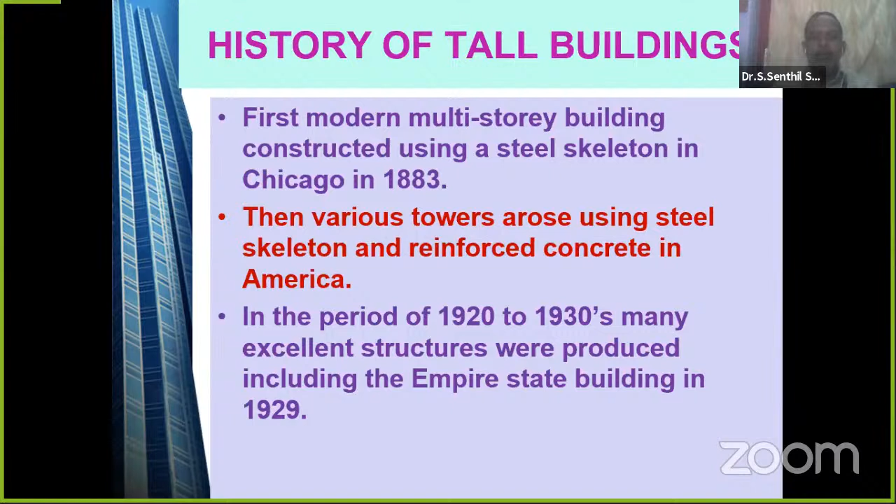The first modern multi-story building was constructed using a steel skeleton in Chicago in 1883. That's the first multi-story building. We can say that the multi-story building concept was started in the year 1883 itself. Then various towers using steel skeleton and reinforced concrete structures came in America, and in the period of 1920 to 1930, many excellent structures came into the world. Particularly, during that period, one of the world wonders, the Empire State Building, came in the US in 1929. That was considered one of the world wonders during that time.

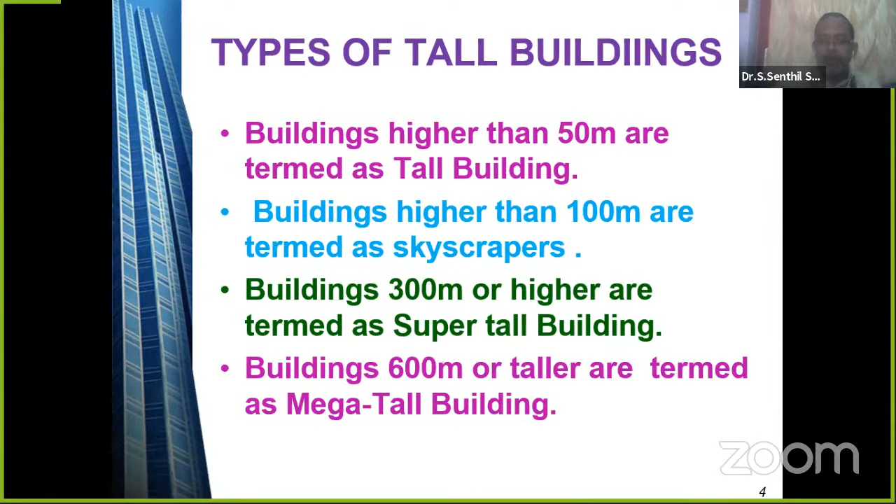We can differentiate the types of tall building according to the height or the number of floors. Buildings higher than 50 meters are termed as tall buildings, and buildings higher than 100 meters are termed as skyscrapers. So between 51 to 99 meters, we can say it's a tall building. When it crosses 99, we can say it's a skyscraper. Buildings 300 meters or higher are termed as super tall buildings. When the height of the building is taller than 600 meters, it is termed as a mega tall building. Therefore, tall buildings are differentiated in 4 ways: tall building, skyscraper, super tall building, and mega tall building.

Why do we have to go for tall buildings? Before going to see the seismic design of tall buildings, we will see what a tall building is, how to construct it, and the points to be remembered while constructing a tall building, taking care of lateral forces like earthquake forces and wind force. The demand for tall buildings comes due to the scarcity of land. Scarcity of land in the sense that when urbanization comes, the population increases, but the area is the same. So to accommodate more population in a smaller area, it is mandatory to go for high-rise buildings. That's the first demand, scarcity of land.

Second one, economic growth. Economic growth is nothing but the growth of the particular place. When you consider Chennai city, the economic growth depends upon the population movement, and more corporate buildings come into the city. So when more buildings are required in a smaller area, ultimately you have to go for tall buildings. That's economic growth. Increasing demand for business and residential space: when it is becoming a metropolitan city, a lot of business should be taken care of in the particular area. The area remains the same, but more corporate people will come and go, and more buildings are required in lesser space. That leads to bringing the tall building concept.

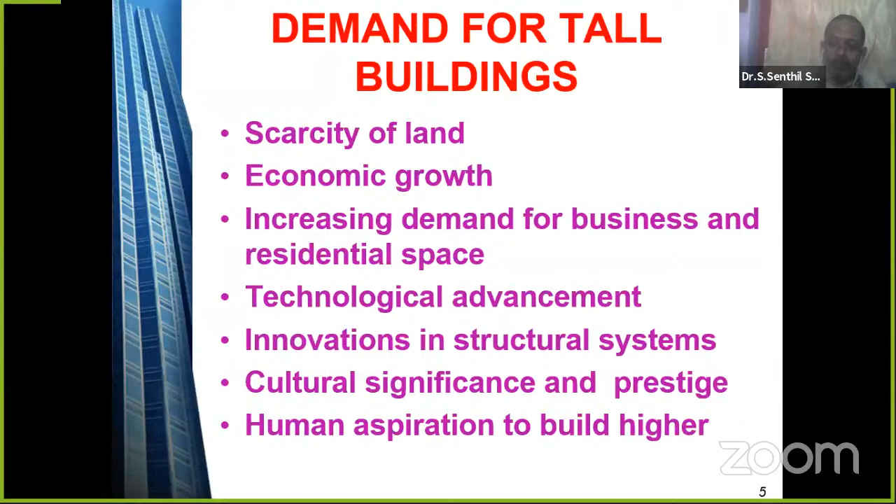Human aspiration to build higher. Actually, the human aspiration is the desire of the people to go for tall buildings. That is the demand for making tall buildings. The need for tall buildings is a mark of prestige, civilization, a landmark in the global picture. Global picture means, if you take Google Earth, the Taj Mahal is a landmark of our India. Similarly, tall buildings are the landmark of a particular country. It is also a symbol of pride.

Okay, increase in demand for shelter is met without encroaching on agricultural land. When we are constructing a multi-story or tall building, we are using only a small area, and we are not encroaching on the area which is already being used for agricultural purposes. That is one of the advantages and needs that leads to tall buildings.

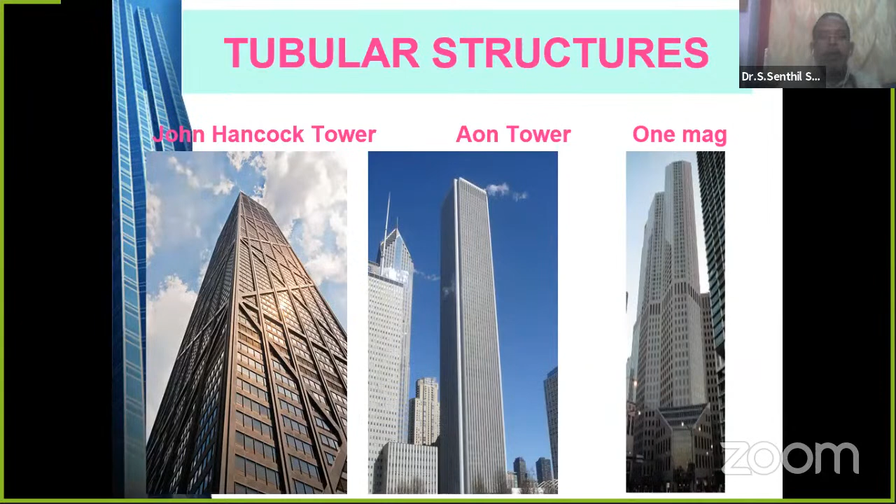Design philosophy: for the design of a tall building, a thorough knowledge of high-rise structural components and their modes of behavior is essential for a lateral load resisting system. If you want to design a tall building, you should know the behavior of the structural components and the modes of failure. All these things are required before designing a tall building. It should be efficient and economic. Whenever you design or construct a tall building, it should be efficient and economic. As civil engineers, we always see these two things, and it should serve the purpose also.

Increase in availability of structural analysis programs needs an understanding of the fundamental knowledge of structural behavior. See, different types of softwares are developed for the analysis and design of tall buildings, and the availability of structural analysis programs leads to the need for fundamental knowledge of the structural behavior of all structural elements in tall buildings.

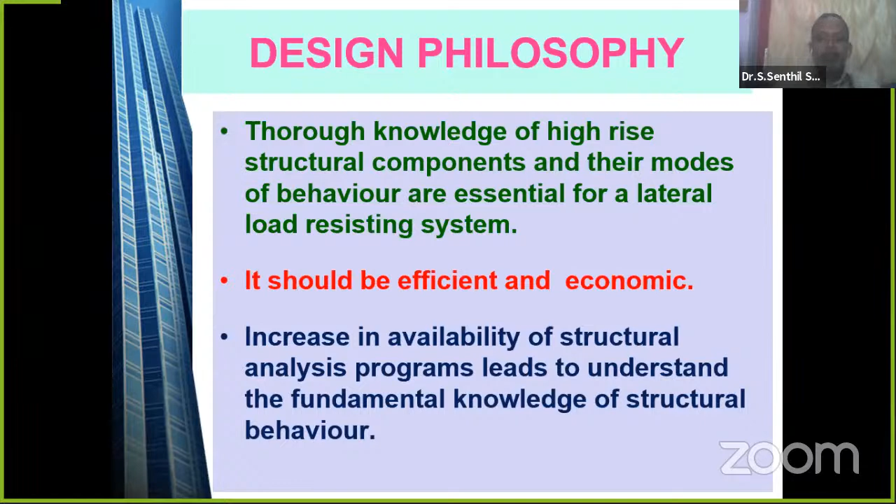These are some of the loads that act on the tall building. Usually we know many loads already - general loads like dead load, live load, snow load. These are some of the general loads.

Beyond which, some loads are very predominant, peculiar, or special for tall buildings. They are impact load, wind load, blast load, and seismic loads - that's earthquake load. These are very important loads to be considered in tall buildings.

Earlier, before the impact of the flight on World Trade Center, the impact load was not considered in the design - not that a huge amount of impact load was not considered, but after the collapse of World Trade Center by the impact of the plane, they considered it while designing tall buildings. They are now considering impact load while analyzing and designing multi-story building structural components.

The wind load always acts laterally, normal to the structure, and then there's blast load. For blast load, we already have code books available - we have to consider it. It is a short duration load that we also consider while designing tall buildings.

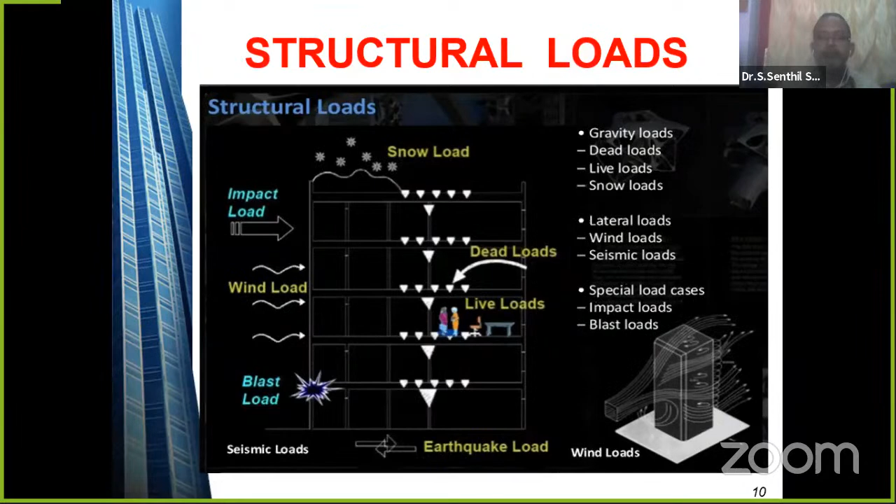Classification of tall buildings: the structural system of a tall building can be divided into interior structure and exterior structure. Actually, the tall building concept is not like a regular building - there are two types: interior structure and exterior structure.

This depends upon the position of the column and the core, and how the columns and beams are provided in the tall building. When taking interior structures, by clustering steel columns and beams in the core, engineers create a steel backbone that resists tremendous wind forces in the inner core. A large amount of columns are provided in the interior, and all the slabs are extended from the interior.

The exterior structure has columns provided at the periphery, the perimeter of the building, creating a hollow, rigid tube as strong as the core design, but weighing much less compared to the interior structures.

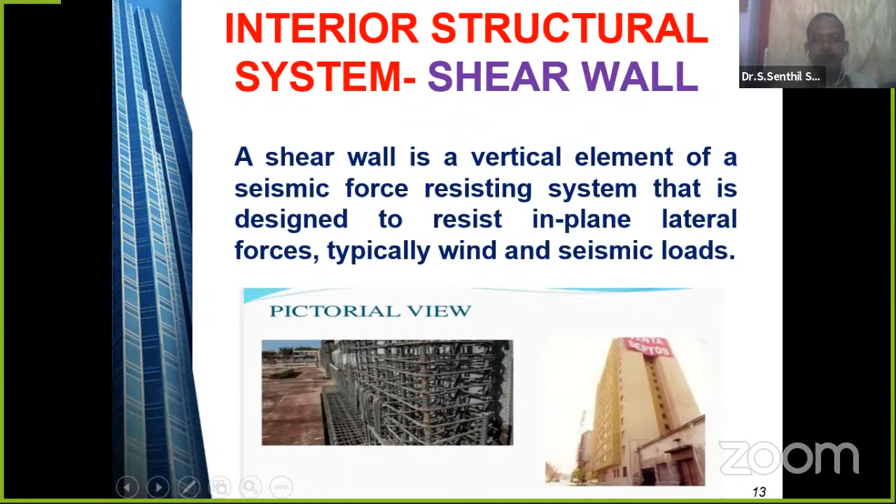Exterior structures include tube and tube systems. I already told you about the tube system, the outer tube. This exterior structure, and many kinds of exterior structures, are available as tube systems. These tube systems are incorporated in buildings in and around the world.

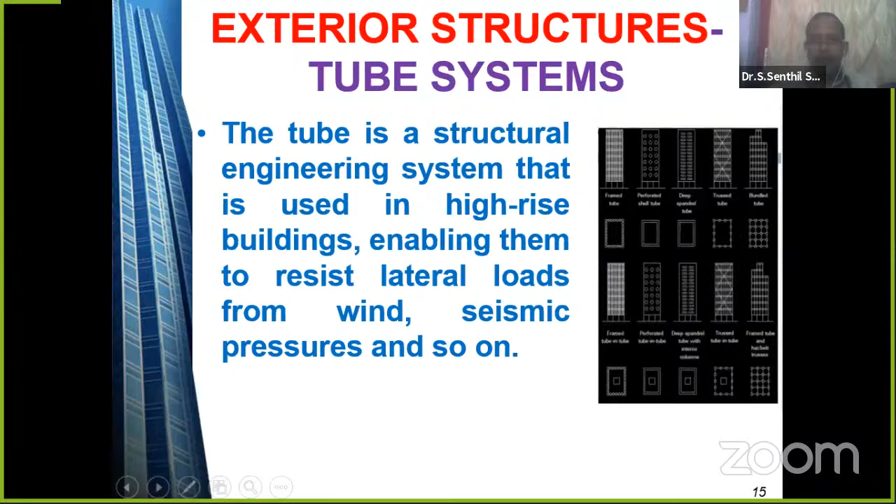Coming to exterior structures, this is a diagrid system, a diagonal grid, made like this. The diagrid system is adopted in tall buildings due to its structural efficiency, flexibility in architectural planning. Compared to closely spaced vertical columns in frame tube systems, diagrid structures consist of inclined columns, as you can see in the photograph.

There is an inclined column, a basic diagonal column, consisting of inclined columns on the exterior surface of the building. These diagonal systems are provided to take care of large amounts of lateral forces. This is a very effective planning from a structural point of view, very effective in handling lateral forces.

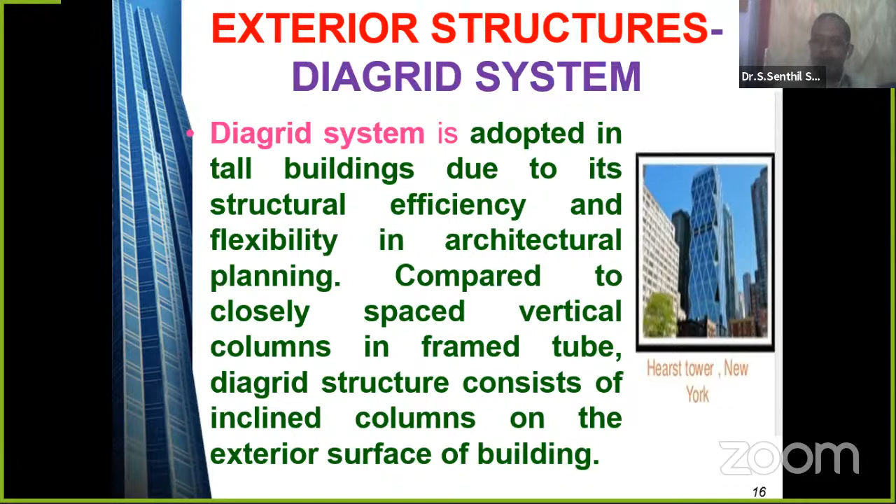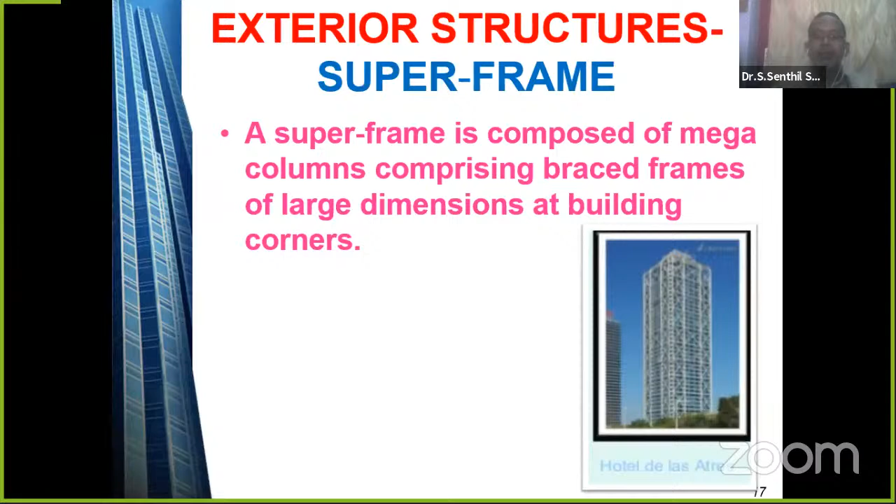Another exterior structure is the super frame, composed of mega columns comprising braced frames, with large dimensions provided at the building corners. In the super frame, the corners are very effectively placed. Mega columns are provided comprising braced frames, where columns are connected with bracings, so that the entire structure becomes a mega strong building. This comes under the tube concept.

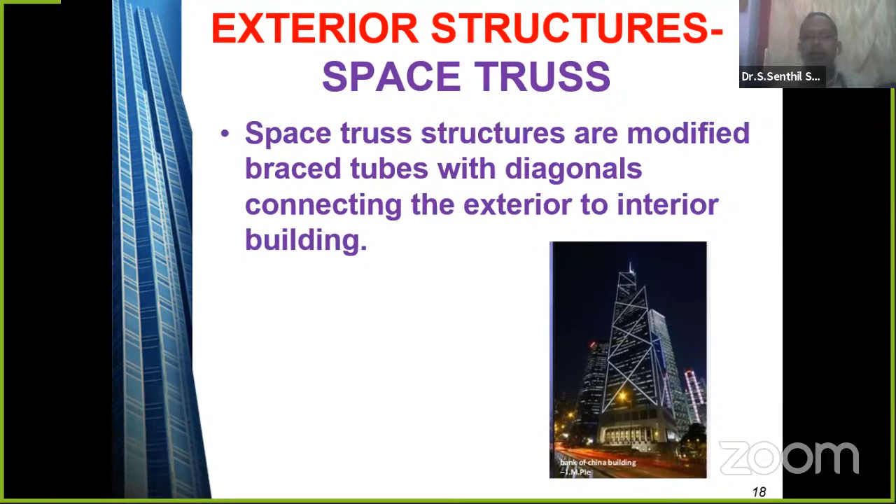Space truss structures are modified braced tubes with diagonals connecting the exterior to the interior of the building. These space trusses are three-dimensional, where the exterior diagonal members are connected to the interior members using horizontal members, which is why it's called a space truss. This makes the structure more strong and reliable, and from an earthquake or lateral load point of view, it will take a large amount of lateral forces without any drift.

The Petronas structural system is a tube in tube system, meaning an outer tube and inner tube will be there. Applying a tube structure for extreme tall buildings is a common phenomenon, as already explained. The exterior surface is made with a large number of columns around the perimeter of the building.

The Petronas Tower has 88 floors, constructed largely of reinforced concrete, and you can see the outer glass facade. This glass facade was designed because Malaysia is a Muslim religious country, and it is designed to resemble motifs found in Islamic art, a reflection of Malaysia's Muslim religion. It was constructed taking their religious aspects into consideration.

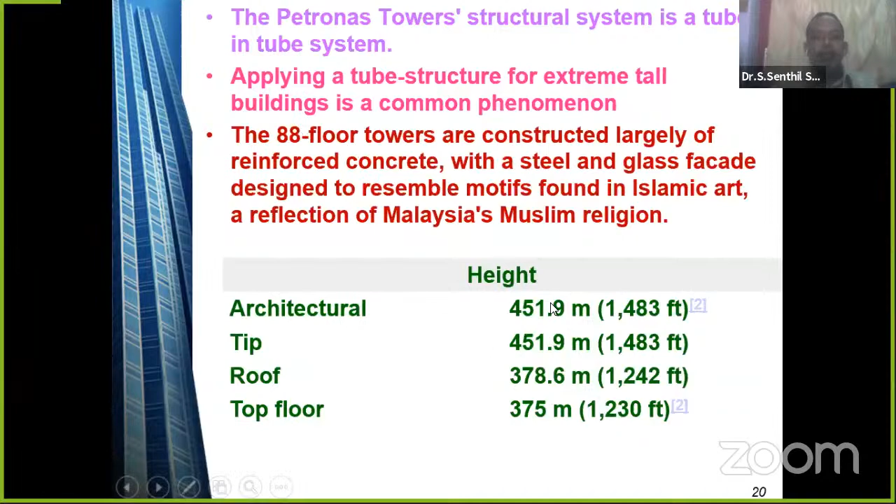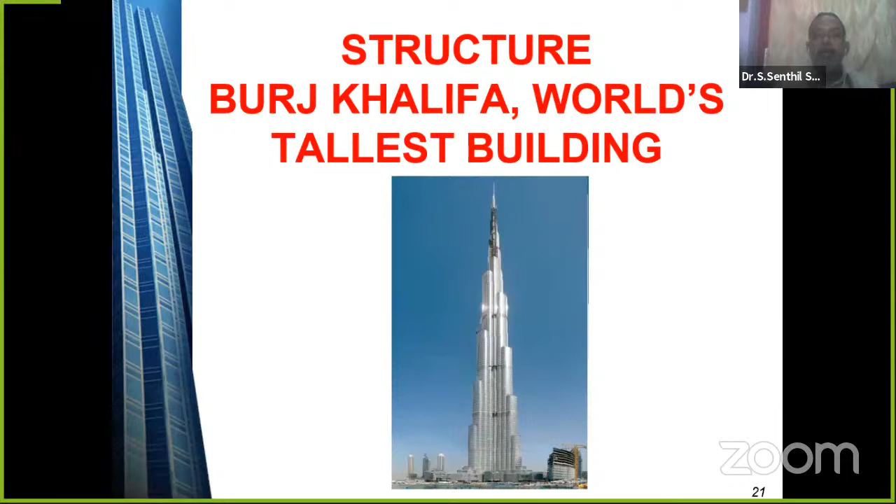When it comes to the world's tallest tower, the Burj Khalifa is the tallest building, now located in Dubai. It is the tallest building at 828 meters height, measured from the bottom to the top. It broke all world records for tall buildings, and was designed by Adrian Smith.

One wing at each tier sits back. That means as each wing moves upward, from bottom to top, some of the tier sits back or stops at level, so the cross-sectional area keeps getting reduced from bottom to top. This upward spiraling pattern decreases the cross section of the tower from bottom to top.

Y-shaped plan provides high performance. This is why we are providing a Y-shape. Like our traditional chairs, we have four-legged chairs and three-legged ones called Mukali, which has only three legs. Having three legs makes it sufficiently strong, placing its legs on three sides so it resists all types of loads.

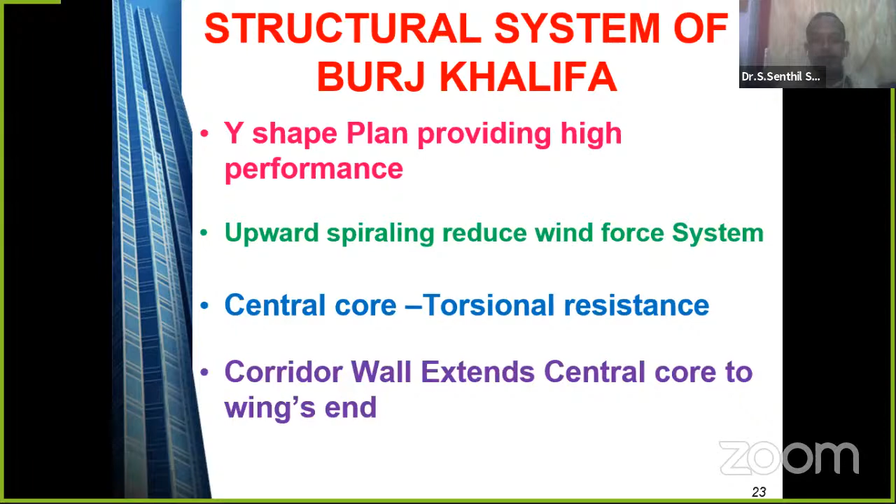Upward spiraling reduces the wind force on the system, the central core provides torsional resistance, and corridor walls extend from the central core to the wing's end. All the corridors are extended from the central core, as I'll explain through this diagram for better understanding. This is an example of the Burj Khalifa's interior structure.

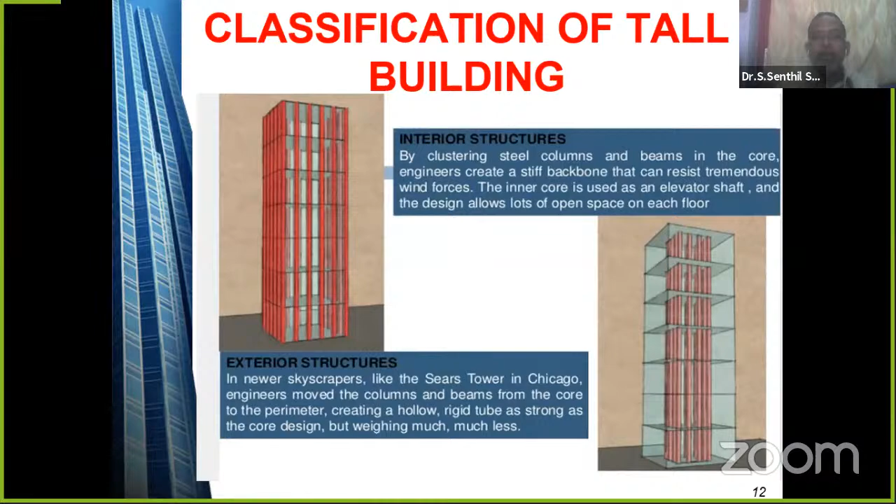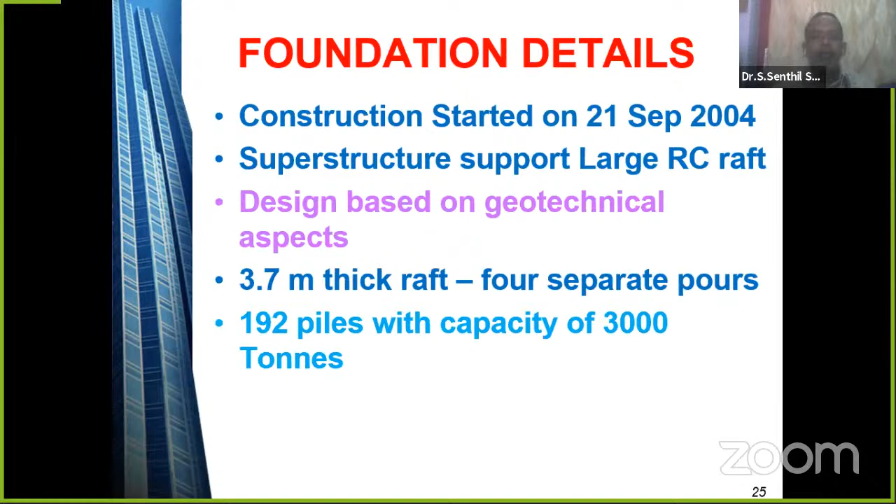The foundation was laid as a 3.7 meter thick raft, constructed in four separate pours since such a thick raft should not be laid at a stretch but layer by layer. There are 192 piles, each capable of carrying a load of 3,000 tons.

The construction stage of the Burj Khalifa started in February 2007. First, it surpassed the height of the Sears Tower. Then on 13th May, vertical concrete pumping was started - the first vertical concrete pumping for such a height, at level 141, where the floor height is very long, made possible through vertical concrete pumping technology.

On 12th September 2007, it became the world's freestanding structure, surpassing the height of all buildings available worldwide. On 1st September, the tallest man made structure was constructed, and on 17th January 2009 it was inaugurated, reaching a height of 828 meters, becoming the world's tallest tower.

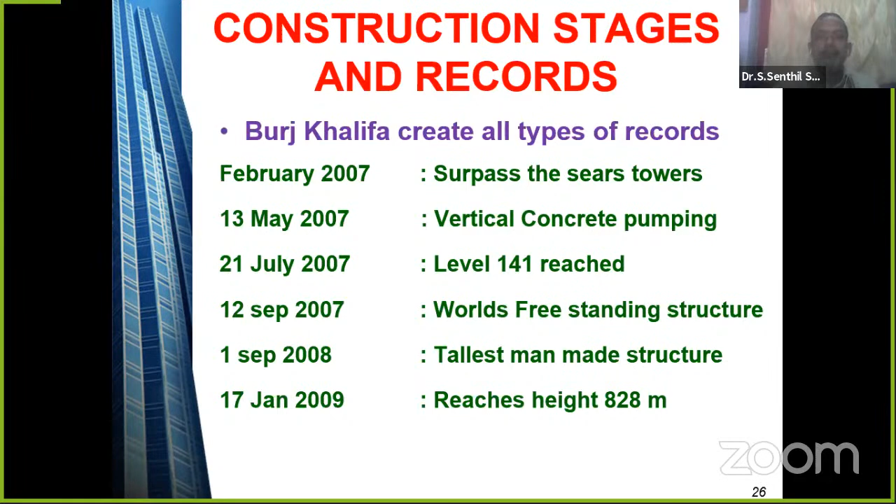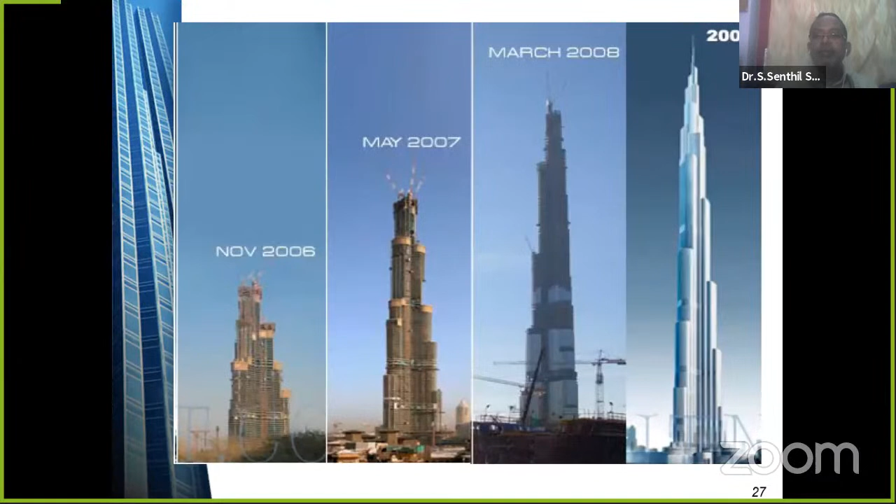So now it is the tallest tower, but every tallest tower will eventually become second. If another building is constructed with a height more than this one, this tower will lose its fame when a taller building is constructed.

It is possible by 2030 that someone will construct a 1 mile high building - that's 1.6 kilometers in height. This would be the first mile-high building, so they could call it a 1 mile high building. It is also possible in the future.

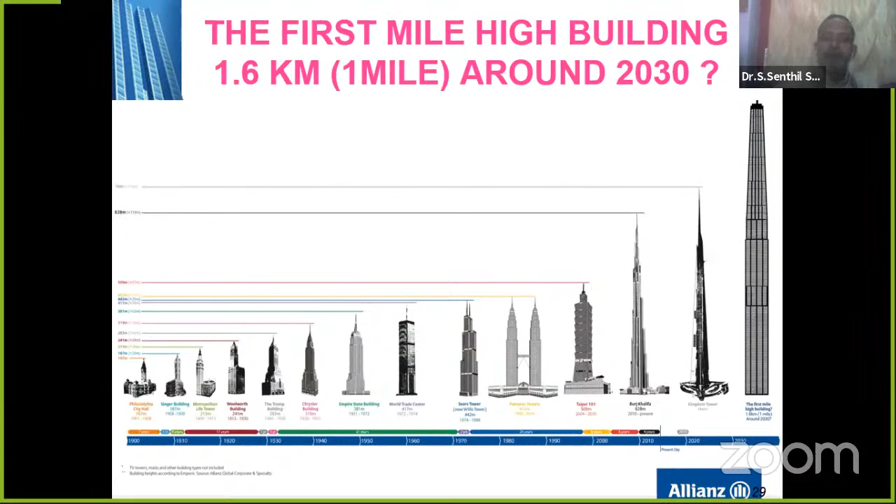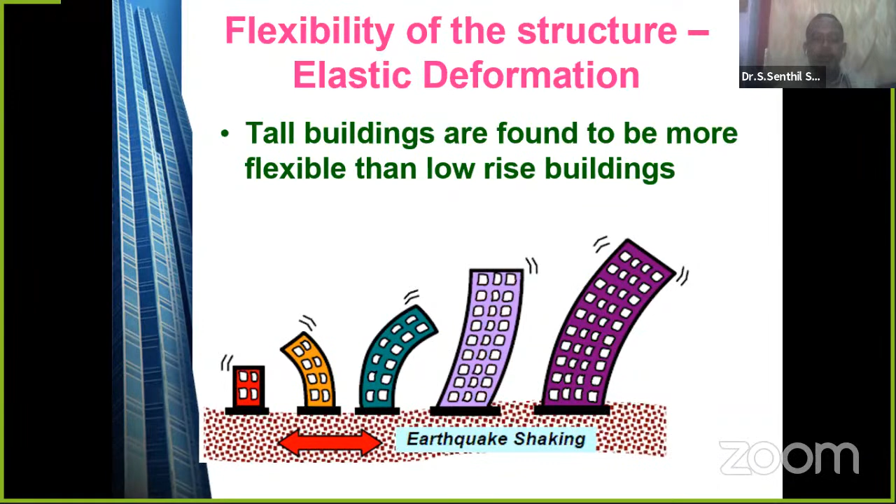Tall buildings are found to be more flexible than low-rise buildings during earthquake shaking. Whenever an earthquake occurs, we have to consider the shaking of the building and design for it. Flexibility is one of the main criteria while designing a tall building.

Now coming to our topic, seismic resistant design of tall buildings. Basis of earthquake. First, what is an earthquake? How will it occur? The earthquake is nothing but ground motion. How long will it occur? How strong? What is the frequency content? How long, how strong, and frequency content differentiate the nature of an earthquake.

How long? It is in seconds. How strong? That depends upon the magnitude of the earthquake. Frequency content: what will be the frequency? Frequency means nothing but a ground excitation or a ground acceleration. That's called frequency. How will the building respond to the earthquake forces?

Strong vibrations will be created during the earthquake. Large stresses and strains will be developed in all the structural components. I repeat once again, when the ground motion occurs, a large amount of stresses and strains will be developed in the structures, particularly the structural components, starting from the foundation to the top floor. All the building components will be subjected to large stresses and strains.

While designing a tall building to consider the earthquake forces, we have to consider the large stresses and strains that will occur in its lifetime. Accordingly, we have to design all the structural components, starting from beam, column, slab, and everything. There may be local failure. Sometimes when the earthquake force is heavy, that local failure may lead to collapse of the structure.

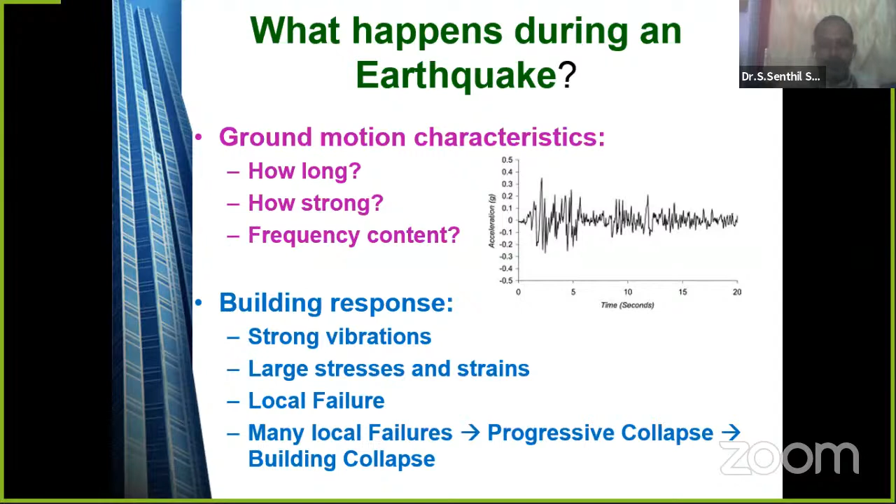Basic design concepts. As I told already, in this webinar we are going to discuss in detail the various design concepts while designing a tall building under seismic force. First, soft story. Earlier, in a tall building, usually they left the ground floor for car parking. That means there is no wall; it's open. Cars will be parked on the ground floor. That is called a soft story.

The weight of that particular story is very less compared with the weight of all the stories above that floor. I repeat once again, in a soft story there is nothing available: no wall, no window, no man-made material. It is only open space where the weight is very less, whereas the weight of the building above the ground floor is very large, so that it acts as a pendulum. The entire mass is concentrated above the ground floor, and lateral displacement may occur and a failure will take place.

Therefore, avoid soft story, because during the earthquake, from the top of the ground floor the entire building starts oscillating, and the bottom ground floor is like a fixed one, whereas the top level is oscillating, and it collapses the ground story columns and beams very easily. Therefore, avoid the soft story concept.

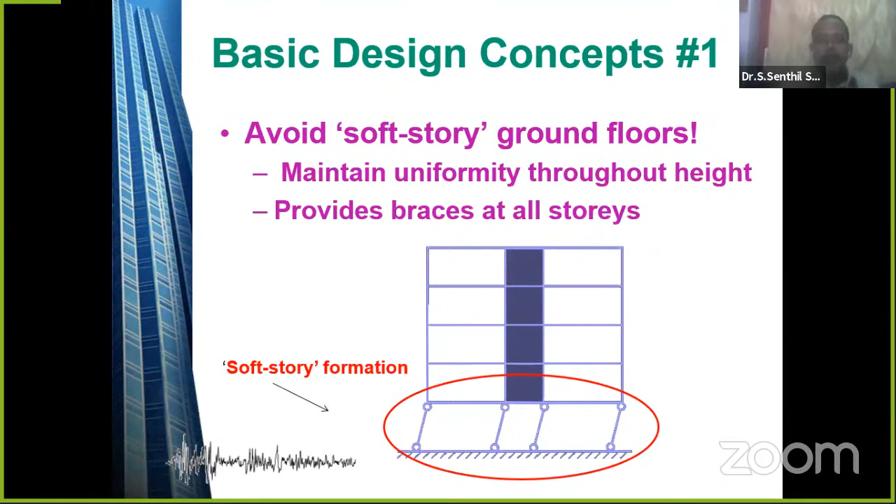Also, don't provide a soft story in the middle floors, and avoid soft stories in upper floors. So maintain uniformity through the height. If you are going to construct a shear wall and it breaks at this level, then the shear wall concept disconnects at this point. Therefore, it is very important to take this into consideration and avoid soft stories in the upper floors also.

Bracings are provided in the columns. Actually, the bracings are provided for redistribution of moments, particularly when seismic forces or lateral forces are acting on the column. When lateral load is acting on the column, a large amount of moment will be created in that particular column, and it tends to move in a lateral direction.

In that case, if it is provided with this kind of bracing, it transfers the excess load to the other column through the bracing. That is the action of bracing. Therefore, the bracings are provided symmetrically. Only then will it serve the purpose.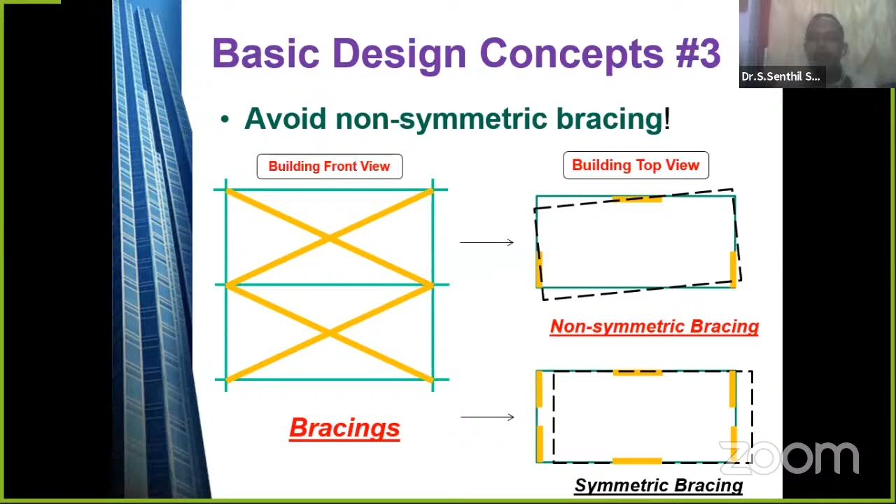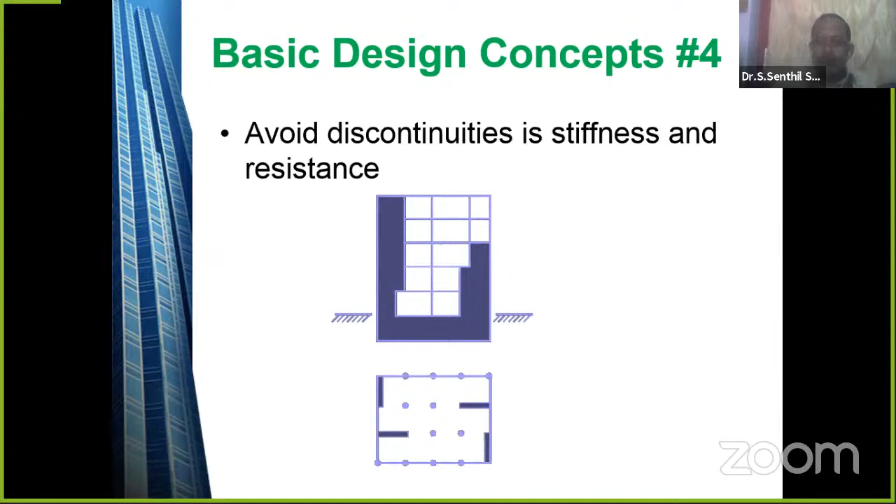This is discontinuity in stiffness and resistance. If you provide infill in the building vertically, infill means providing brickwork or any other method of construction between the columns, it should be constructed continuously. If you provide the filler material in an unsymmetrical manner, it causes discontinuity, and the stiffness is also not properly distributed, which leads to collapse of the structure during a large earthquake force.

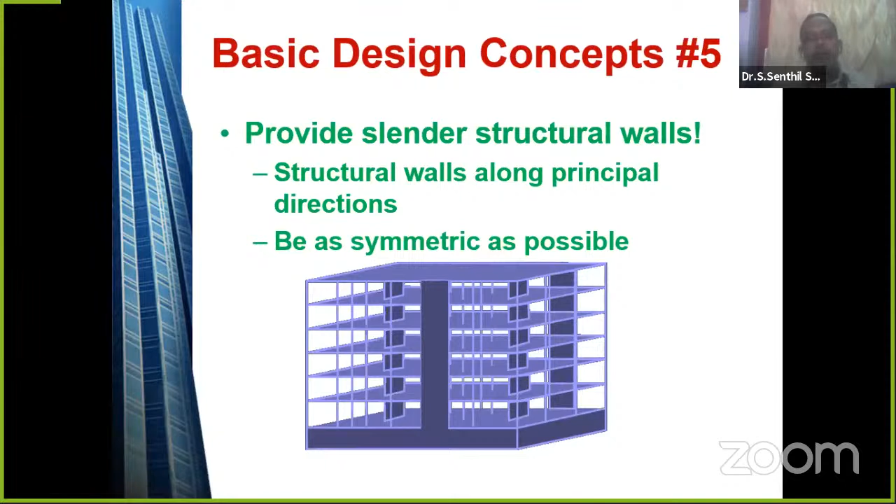We are discussing the design concepts of providing slender structural walls. Structural walls along the principal directions should be as symmetrical as possible. A normal rigid wall behaves like a brittle material. If it is a slender wall, it behaves like a ductile material. It will sway predominantly, and it will take a large amount of lateral forces without any collapse of the structure.

Avoid short columns. In buildings, sometimes it is necessary to provide short columns. These short columns are very critical in shear failure, because the failure of short columns is by crushing, and shear is a very critical failure in short columns. Avoid short columns in tall buildings.

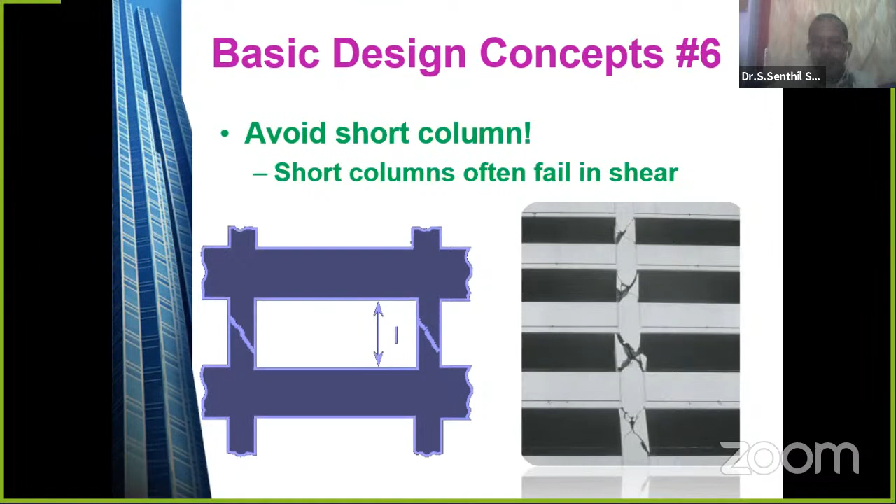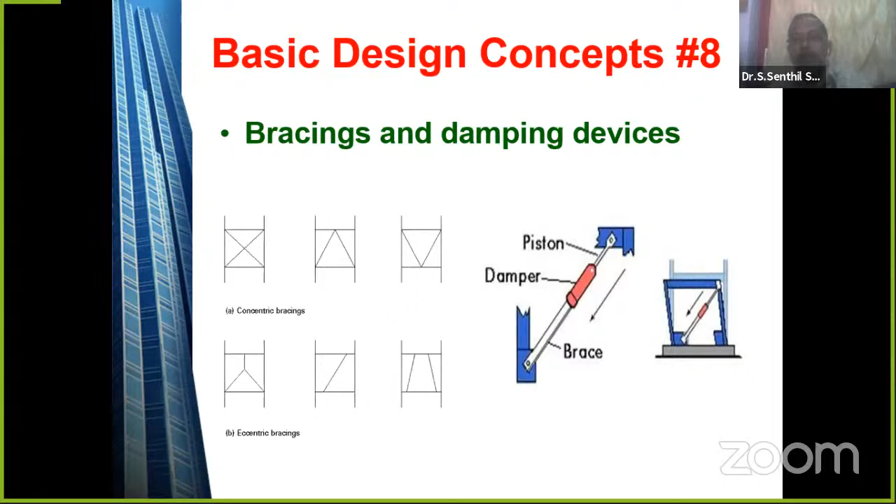And we have to provide dampers. We will see the different types of dampers in later slides, especially what a damper is and the purpose of dampers.

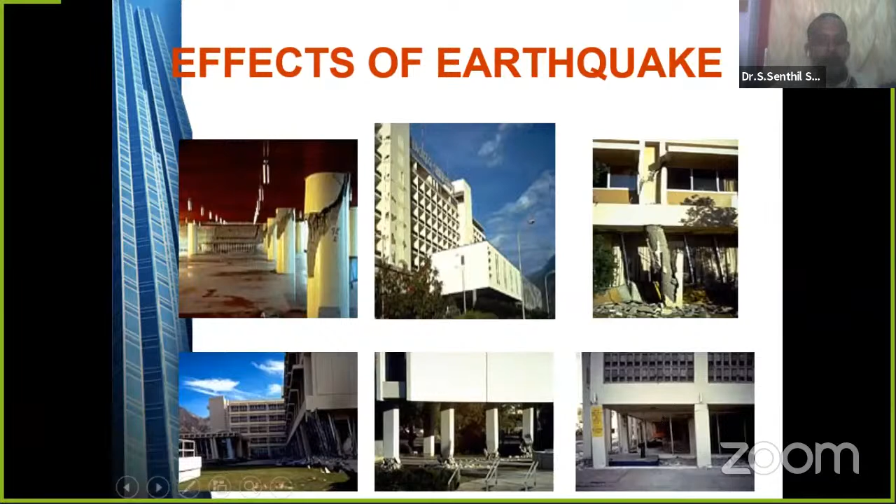Taking a case study, Hotel Macuto Sheraton, Caraballeda, Venezuela. Here, we are taking the hotel building during the 1967 Caracas earthquake. A 10-story building was taken. The building consists of a reinforced concrete frame with shear walls in the transverse direction.

So it's 4 to 8. And the shear wall is considered only from 4 to 8; up to the floor level of 4 there's no shear wall, and due to that a large amount of failure occurs up to the 4th floor in the building. The shear walls are interrupted at the 4th floor level, where there were 1.1 meter diameter reinforced concrete columns which were severely damaged due to the non-availability of shear wall.

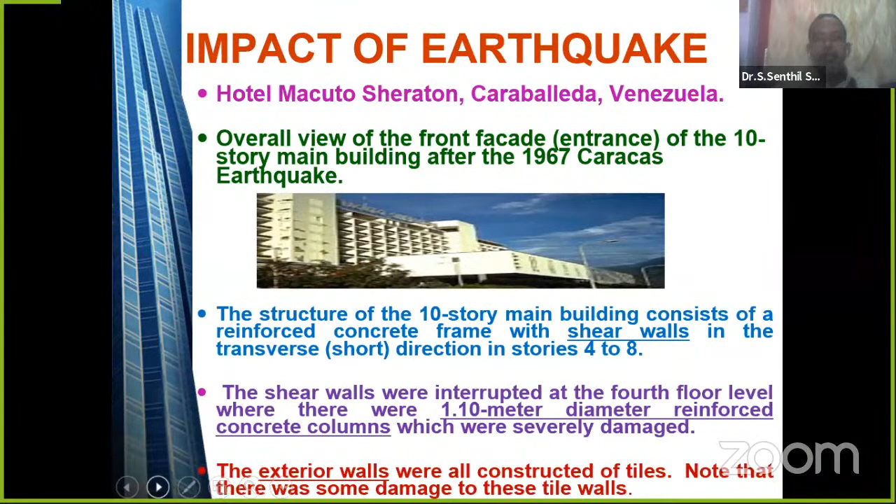The exterior walls are constructed of tiles. Note that there was some damage to the tile walls also. That will not take into consideration the earthquake forces. Details of structure: slide showing damage of 1 meter diameter column, third story. Here, because the shear wall started only from the fourth story, at the third floor, due to the earthquake, the concrete column collapsed, or you can say it cracked in an inclined manner.

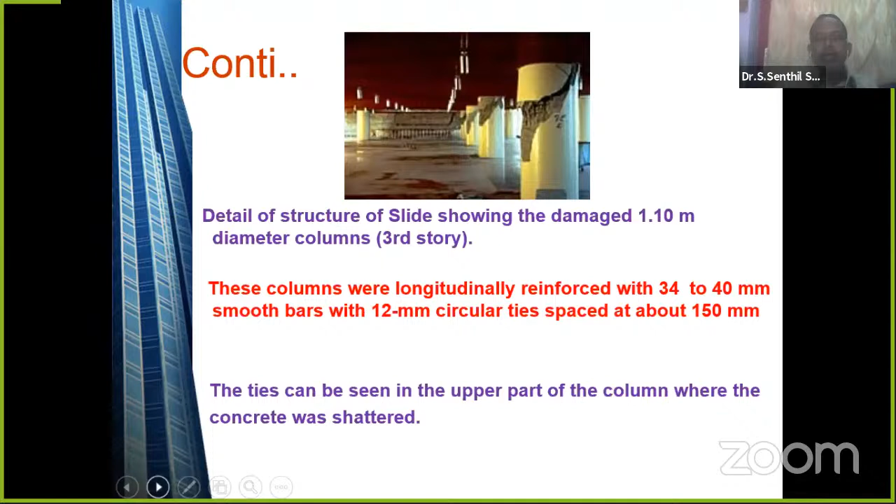These columns are longitudinally reinforced with 34 to 40 mm smooth bars with 12 mm circular ties spaced at 150 mm center. 34 to 40 mm bars are provided, even though it was cracked due to the non-availability of shear wall. The shear wall is taking care of a large amount of earthquake forces. That's the main point of providing the shear wall. The ties provided on the column where the concrete was shattered; due to the crack developed, the ties were shattered from the column.

During the load on the column, or during the earthquake forces, the column will buckle. There are two types of buckling. Two types of mode shapes are available in the buckling of the column. One is first order, the second one is second order. First order is a single dimension; the buckle will take place only in a vertical direction. And the second order buckle will take place not only in the vertical direction but also along with rotation.

Steps in seismic design. Here, plan the building structure in a symmetrical way, both in plan and elevation. Sometimes it is not possible symmetrically, because availability of the land is a very important criterion. If it is a coarse land, it is not possible to make it symmetrical. But as far as possible, make the plan symmetrical, so that the structure is very safe from the earthquake point of view.

Avoid open ground soft story. Already told you, avoid soft story, that is open ground floor. Avoid weak story and provide a strong diaphragm. Thinner slabs and flat slabs are to be avoided because they are vulnerable from the earthquake point of view. Provide openings of doors and windows at a distance of minimum 0.6 meter from the column edges. When you want to provide doors and window frames, they should be a minimum 2 feet away from the face of the column.

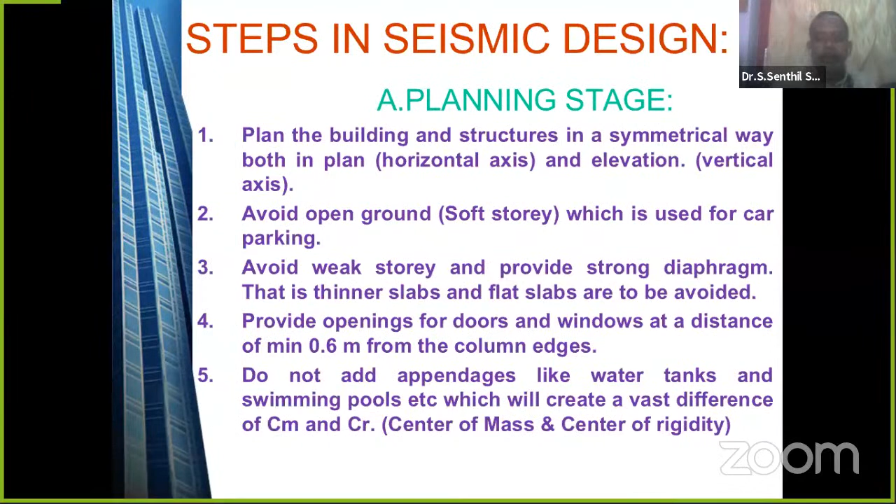You have to consider the soil profile also, or the soil characteristics, whether the soil is predominant or it leads to any liquefaction. Because soil liquefaction is a very important phenomenon that should not occur for the building. During the earthquake, soil liquefaction will topple the building very easily. Okay, also while designing tall buildings.

For tall buildings, we have to consider the National Building Code and the Indian Standard Codes while doing the analysis and while doing the design. We have to follow the Indian Standard norms and the National Building Code norms. Select a good material: concrete, brick, steel, water maybe.

The steel should have at least a minimum 14% elongation. Only then can we say the steel bar will take a large amount of deformation, or you can say it's ductile in nature. Then a minimum yield strength of 415 Newton per square mm you have to take. The yield strength should not be greater than 415, and if you are providing a 500 Newton per square mm rod, check whether it has the 14% elongation.

Already we know we have to provide a plinth beam and lintel beam connecting the columns in the primary direction and secondary direction also, so that it will act as bracing at the ground level, lintel level and roof level, so that whenever there is an excess amount of moment, it will transmit the moment to the other column through the beam.

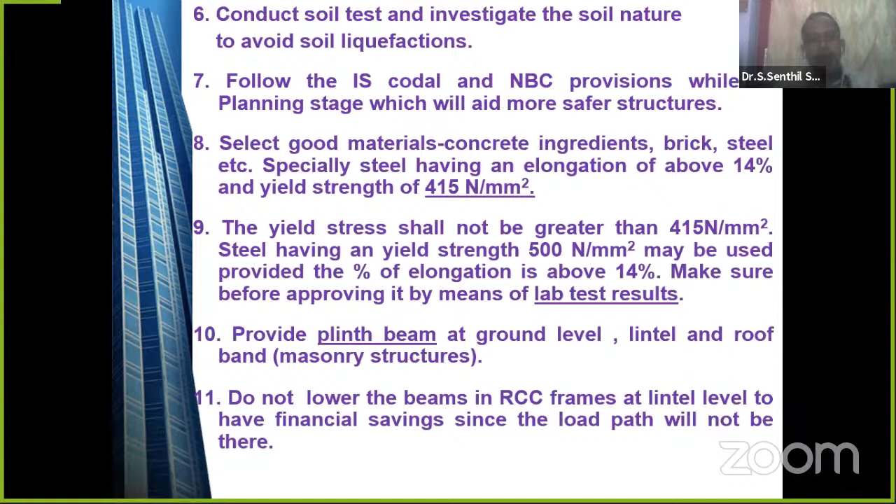The building geometry should be reasonably proportional; avoid long, tall, or wide dimensions, which are known to result in poor seismic performance during an earthquake. As I told already, the geometry should be symmetrical. These are really helpful in controlling problems like blockade of roads, collapsing of adjacent buildings, or the unfortunate situation of building collapse during an earthquake. When it is unsymmetrical, the collapse of the building will spoil the adjacent structure also. Therefore, as far as possible, the geometry is considered symmetrical from the earthquake point of view.

The height to plot width ratio should be maintained at less than 1.3. For plot size, we have to follow clause 6.6 of National Building Code 1983 Part 3, and the height of the building is considered according to clause 9.4.1. Considering this plot size along with IS 1893 for the earthquake resistant design of structures will give stable structures. If you follow this rule, the building will be safe against earthquake.

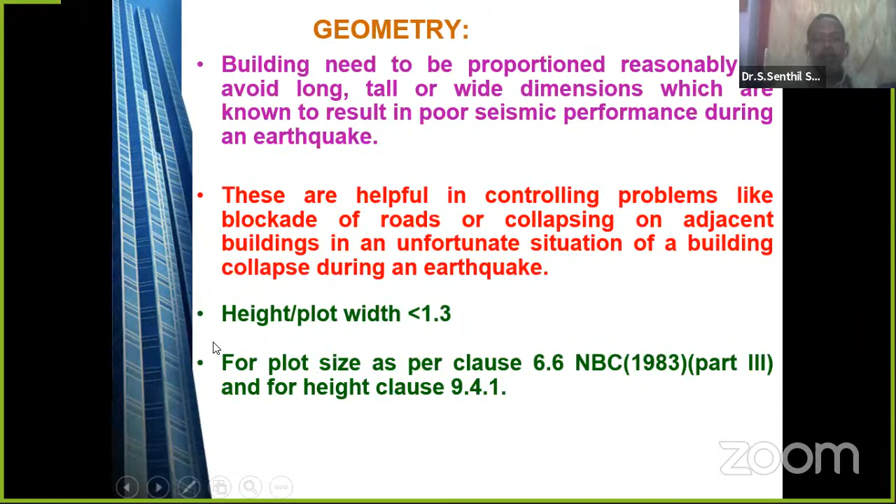IS 1893 provisions are given to improve the shape and subsequently the behavior of the building during earthquake shaking. Design provisions may not exist explicitly for the height of the building, but it is desirable to ensure that buildings are not made too long, the height gives a regular desired shape, and the slenderness ratio is within the permissible limit. According to IS 1893, we have to follow these norms for tall buildings and for earthquake forces.

Under the design stages, the designer is a very important person for the design of a tall building, because after the analysis is over, taking the vulnerable or maximum values, we have to go for designing the tall building. It should address the influence of the masonry infill, lateral forces, and the behavior of the structure, and all these things we have to take into account in the design process. Separation gap, as already told you, 20 to 50 mm compared with the calculation. Strong column, weak beam design, thick slab which acts as a diaphragm, and flat slabs should be avoided. This already we have seen.

Provide cross walls which will stiffen the structure. Actually, when you have a soft story, there is no shear wall and no cross walls, because only the columns are available. When it's made into car parking, you can't provide any cross walls between the columns. When cross walls are provided, at one point of time, when the columns are subjected to more load during the earthquake, they will transfer the load to the wall. The wall will take some amount of energy; some earthquake energy will be dissipated through the walls. That's why we insist on providing cross walls as far as possible.

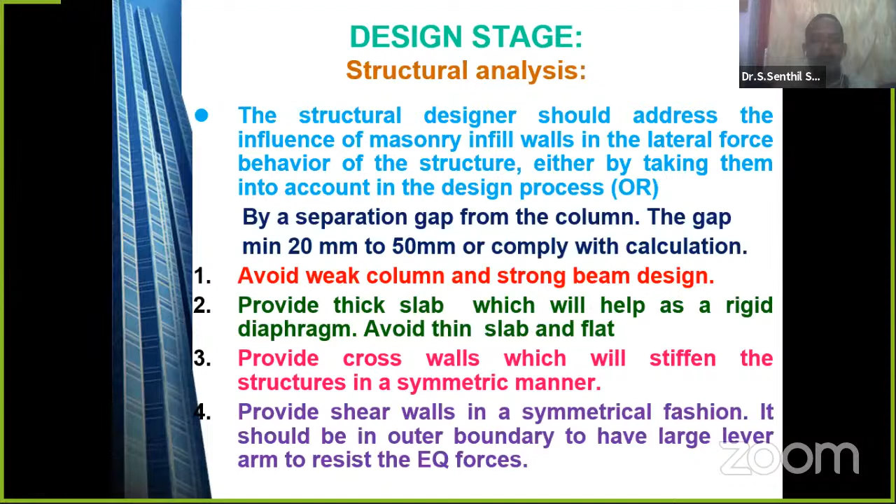Provide shear walls also in symmetrical fashion, at the boundary, with a large lever arm to resist earthquake forces. So this is a very important thing.

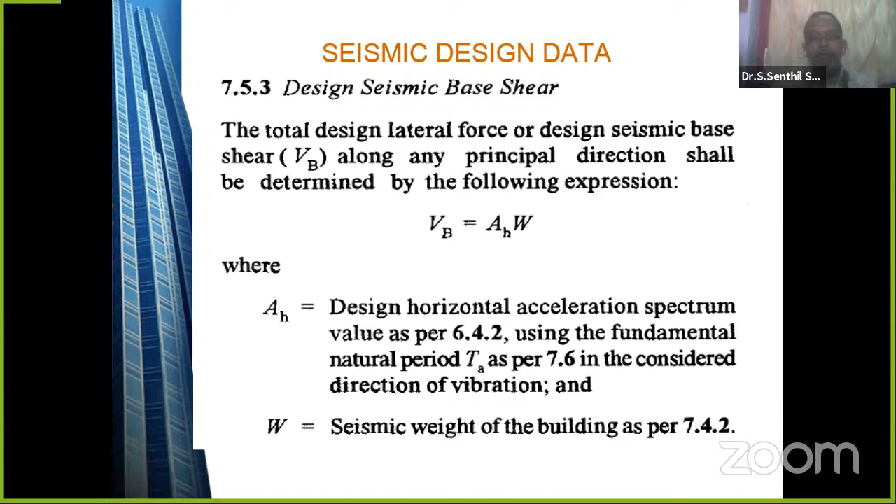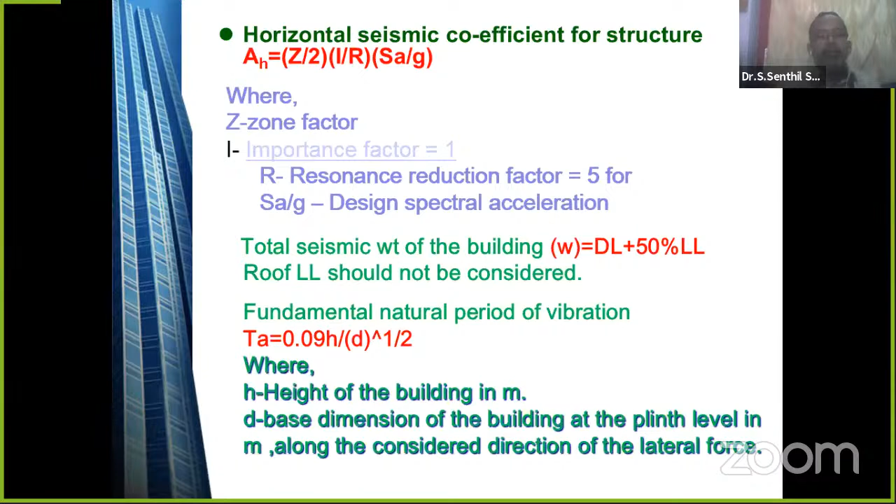For the seismic design data, we have to consider IS 1893, how the seismic design base shear is calculated. This base shear is calculated using this formula and taken into account while designing and detailing the structural components of the tall building. This is the horizontal seismic coefficient for the structure. You have to calculate it using the formula available in IS 1893, and these values are calculated and incorporated in the design.

After calculating the seismic design coefficient and calculating the base shear, we have to go for design for earthquake forces. Base shear is already calculated. Also, analyze the structure under the static lateral forces and for the gravity load. Normal analysis we have to do, and we have to do the analysis of the building for the earthquake forces.

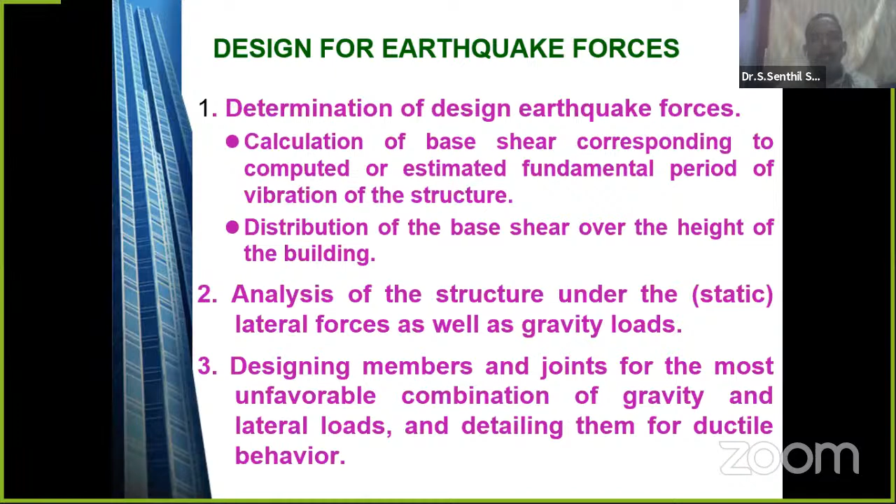Combination of gravity load, lateral load, detailing them for ductile behavior. Combination of lateral load, gravity load and the earthquake forces, and design the building and detail the building and go for ductile detailing. It will give a good structure to take into account all the forces combinedly, both gravity and lateral forces.

Ductility, how to improve the ductility of the building. Ductility is the ability of a structure to undergo inelastic deformation, a large amount of deformation. Whenever you're taking the tall building, a large amount of deformation takes place at the top level. The drift, that is the movement of the top floor, may be clearly visible. When the top story of the building is moving from its place, that does not mean a collapse of the structure. It is swaying. It is displacing. It is not a collapse of the structure.

It is mentioned here: the ability of a structure to undergo inelastic deformation beyond the initial deformation with no decrease in the load resistance. That's a very important point. That's why it is given in capital letters, no decrease in the load resistance. Load will be resisted by the structure, and the flexibility makes the structure undergo a large amount of deformation that will dissipate the energy due to the action of the load. So it may be a gravity load or lateral load.

Ductility can be increased in the section by decreasing the percentage of tension steel. Whenever tension steel is decreased, the good old concept we used to teach our students: under reinforced section is preferred to over reinforced section. Steel controls the design, not concrete. That is the concept here. We have to decrease the percentage of tension steel so that concrete will not fail first, steel will fail first. It will give sufficient warning to the people because the steel has a large amount of ductile nature.

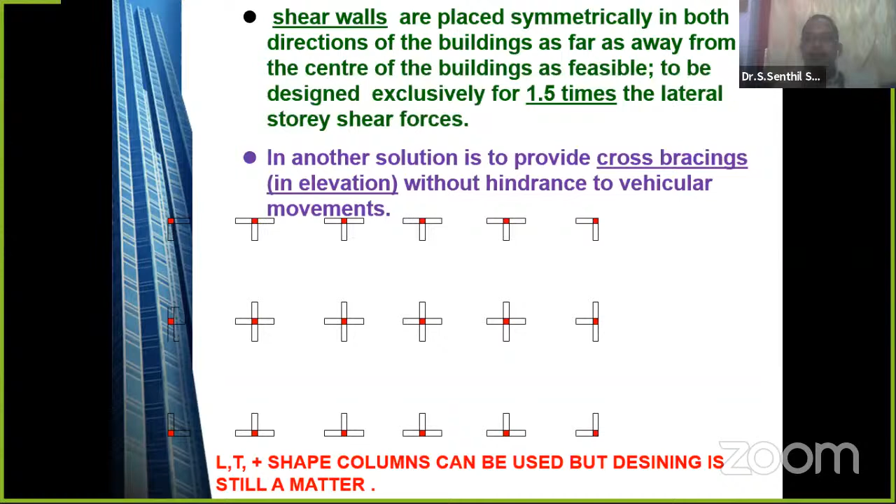Another solution is to provide cross braces in elevation without any hindrance to vehicular movement. If it is possible, we can provide even in the car parking some cross bracing without affecting the movement of the vehicles. Or we can go with some kind of columns, T and L shaped columns can be used, in a symmetrical manner. But design of these columns is very important. These are some of the basic braces to be used in tall buildings.

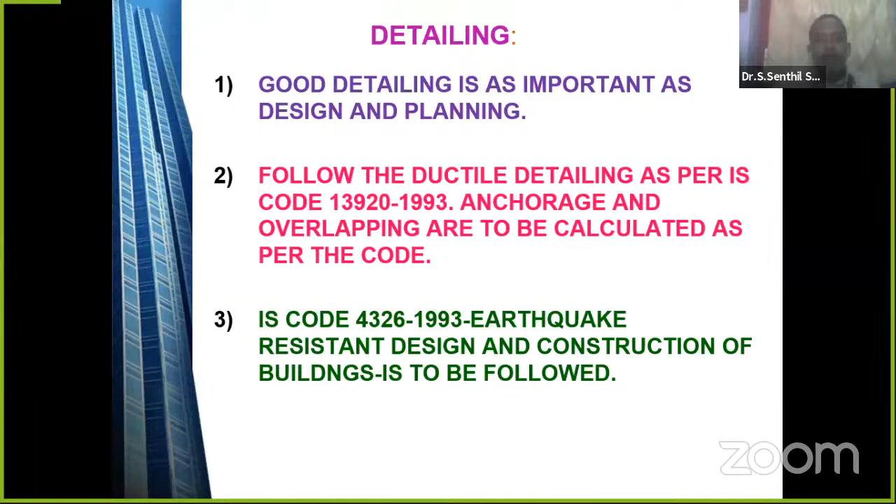For seismic resistant design of buildings, good detailing is required, because in the tall building detailing is very important. The detailed diagram will go to the site for the people who are going to execute the work. Therefore, good detailing is very important. And for the detailing, as per IS 13920/1993, anchorage and overlapping are to be calculated as per the code for the steel members. IS code 4326 earthquake resistant design and construction of buildings is to be followed for the design and for the construction of the tall buildings.

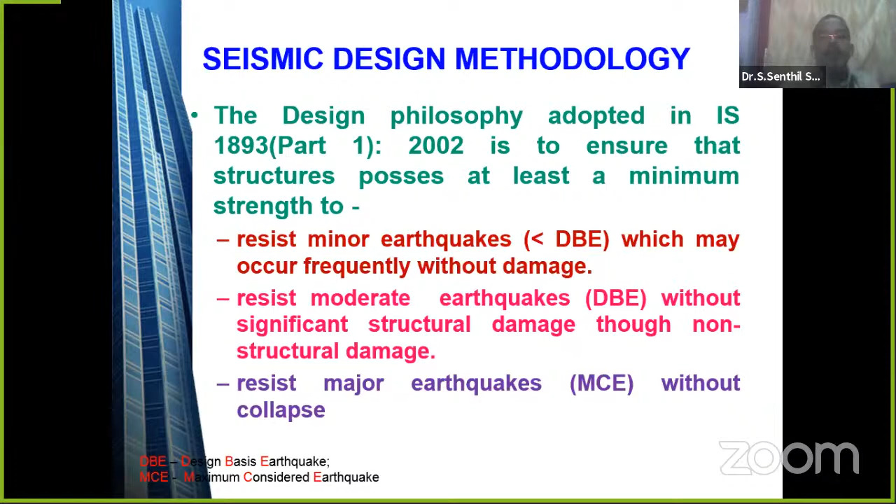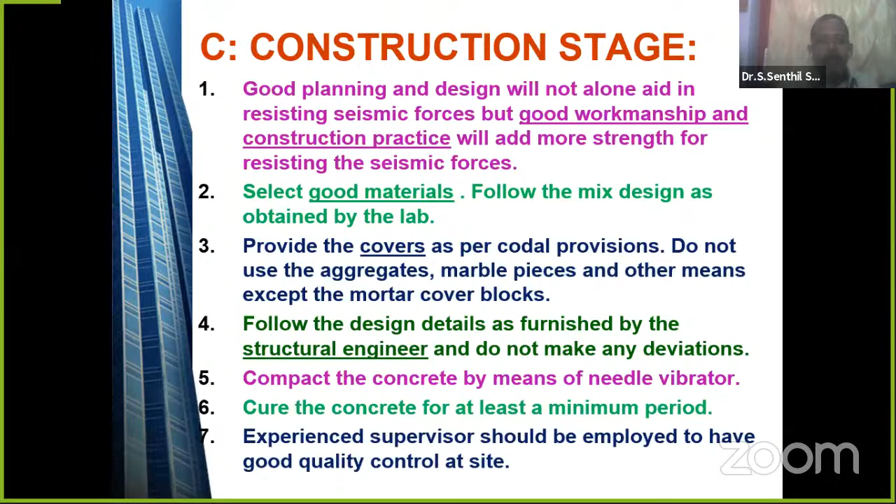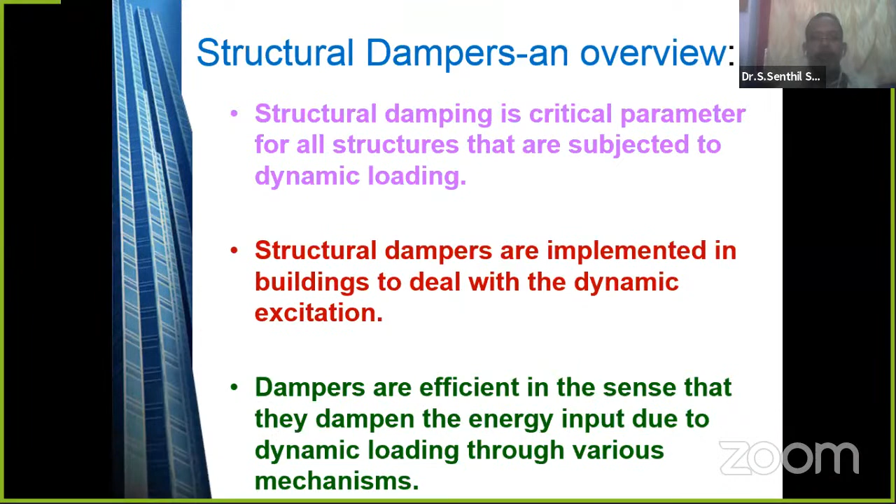Structural damping is a critical parameter for structures that are subjected to dynamic loading, that is, loading developed by seismic forces. Structural dampers are implemented in buildings to deal with dynamic excitation. Dampers are efficient in the sense that they dampen the energy input due to dynamic loading through various mechanisms, which we are going to see.

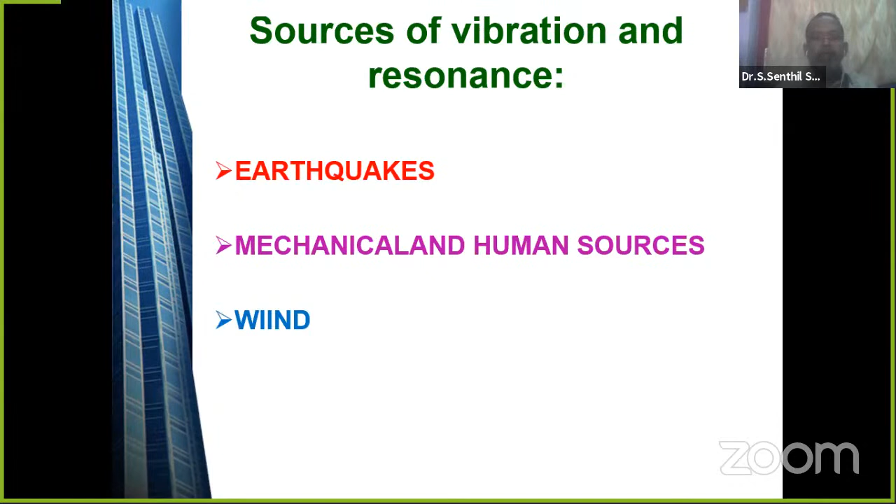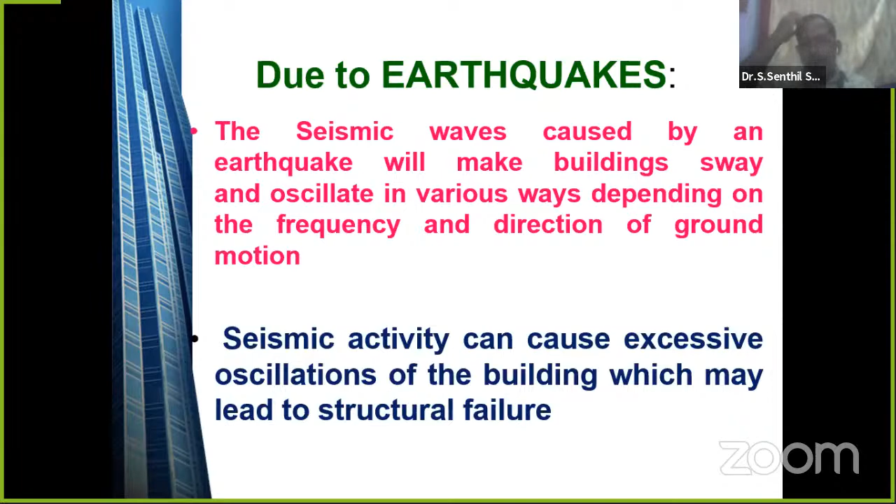The sources of vibration affecting the structure include earthquake, mechanical and human sources, and wind. These develop lateral forces, or a dynamic motion on the building. Due to earthquake, the seismic waves will make buildings sway and oscillate in various ways depending on the frequency and direction of the ground motion. According to the ground excitation, the building will oscillate. This seismic activity can cause excessive oscillation, which may lead to structural failure. To avoid structural failure, if the energy developed by the excitation is absorbed by some means, the structure will become safe. That is the advantage of providing dampers.

Mechanical and human sources can develop extra energy. Many people moving together in a crowd can cause a serious problem in large structures like a stadium. Whenever there is a stadium, we have to provide dampers, or else the movement of people in a short period will create a lot of lateral movement, which should be avoided by providing dampers. Vibration caused by heavy industrial machinery or generators in a building should also not be transmitted to the building; this is avoided by providing dampers.

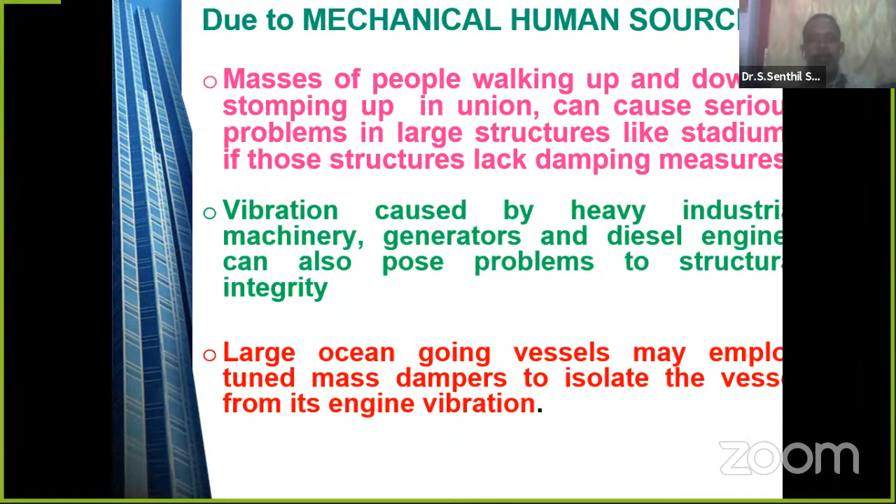Large ocean-going vessels like ships may employ tuned mass dampers to isolate the vessel from its engine vibration. The engine vibration will not go to the ship. By providing dampers, the vibration will not be transmitted to the ship. That is one kind of damper provided in ships.

This is about buildings and the use of structural dampers, their area of application, and the different types of structural dampers.

Frictional dampers: when two plates move in the opposite direction, friction takes place. This friction absorbs more force during the earthquake. During an earthquake, as the two plates move one over the other, some amount of force is absorbed by the friction between the plates, and it is not transferred to the structure. This is called frictional dampers.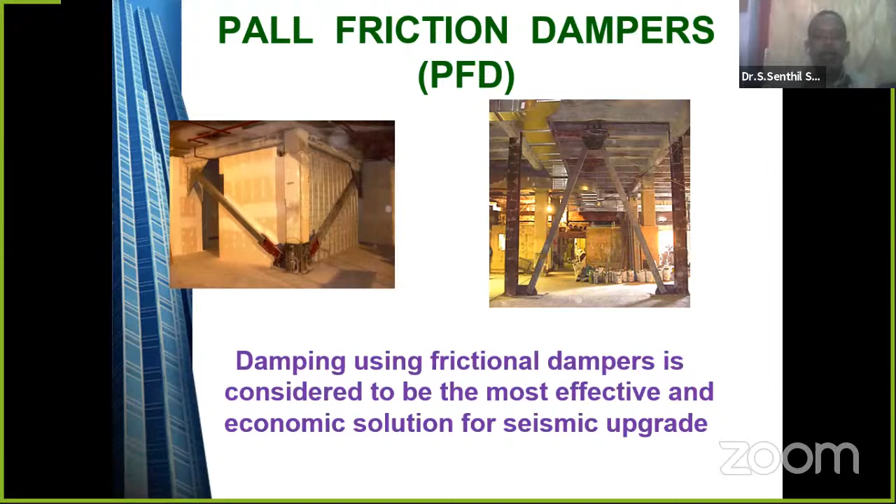Frictional dampers are considered the most effective and economical solution for seismic upgrade. In the late 1970s, friction dampers were developed, inspired by the principle of friction brakes in automobiles. Just like in automobiles, where the wheel is stopped using rubber shoes that create frictional force between the wheel and the rubber shoe, similarly, when frictional force develops during seismic activity, it absorbs a large amount of the earthquake force through the friction developed by the plates.

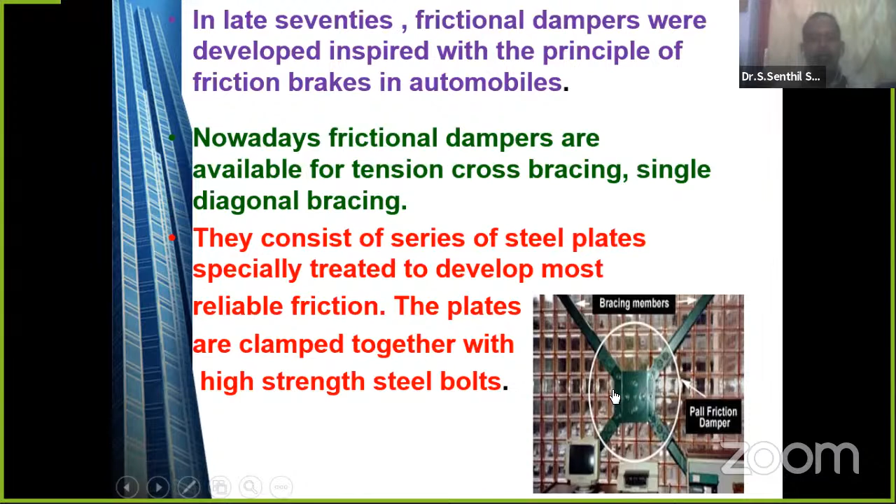These plates are provided in the structure. Nowadays, friction dampers are available for tension cross bracing and single diagonal bracing, and are used in many places. They consist of a series of steel plates specially treated to develop reliable friction. When these steel plates are provided, sufficient friction force can be developed during an earthquake, absorbing the earthquake forces so they are not delivered to the building. Here are some examples of friction dampers provided in buildings.

Metallic dampers are popular, inexpensive, and provide an energy dissipation device. During an earthquake, a large amount of energy is produced and developed, and this must be absorbed by some means so the structure becomes very safe. As civil engineers, we have to provide dampers in earthquake-prone zone buildings so the structure becomes very safe.

Other metallic dampers provide good ductility and high potential for dissipating energy in the post-yield region. In metallic dampers, there are two types: single round hole dampers and X-shaped dampers. During an earthquake, the single damper moves in a lateral direction, absorbing or dissipating the energy, and it yields.

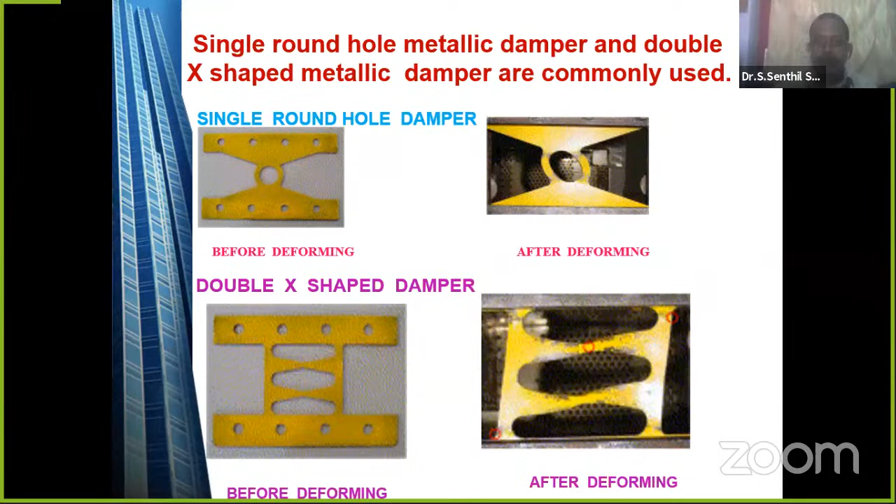This is another example of X-shaped metallic plate dampers provided in a building, a two-story steel frame with metallic dampers. When large lateral forces are applied, this damper absorbs a large amount of the seismic forces, so the structure frame remains safe and in a stable position.

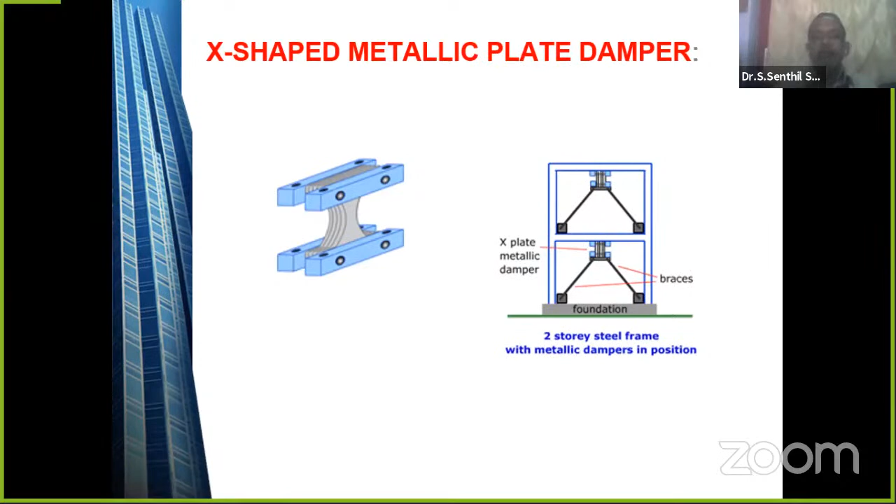Viscoelastic dampers have a viscoelastic material provided in the middle. When the structure is placed over this steel plate, the viscoelastic material absorbs a large amount of the forces, or the energy developed by the seismic forces, and the structure above remains in a stable and good position without any damage or collapse.

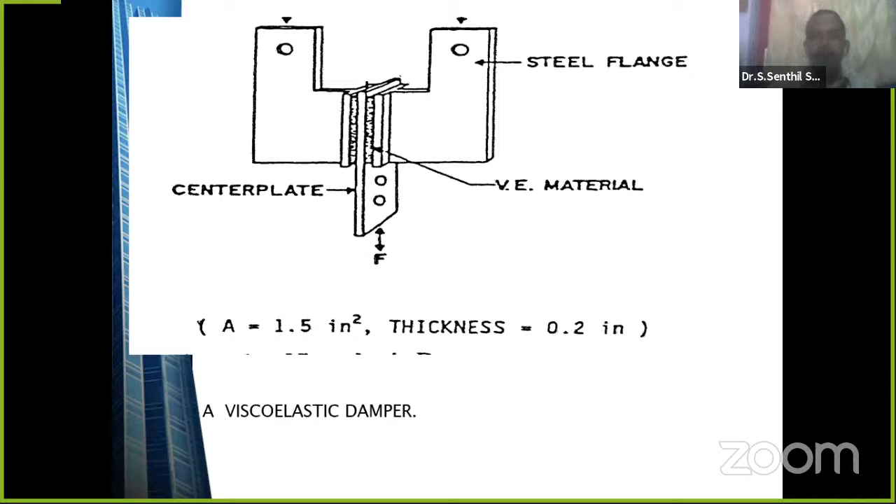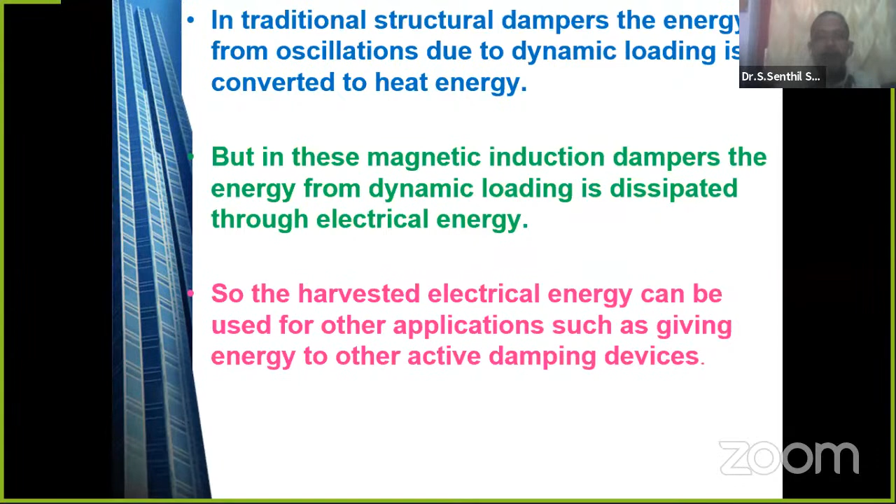Tuned dampers: we have three types - tuned mass dampers, tuned liquid dampers, and tuned liquid column dampers. These are man-made dampers. Tuned mass dampers are a very interesting example.

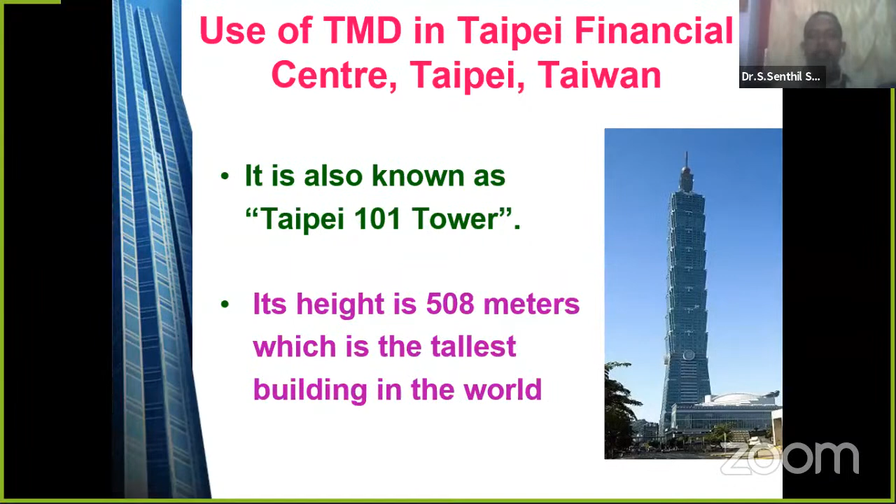Tuned mass dampers were first provided in Taipei Tower, which has a height of 508 meters. It was the tallest building in the world at one time, before the Burj Khalifa.

The mass is normally situated in a stable position in the building. When the building moves left to right, this mass will move right to left, so that it will absorb a large amount of forces. That's why it is called dissipating the energy - that's the tuned mass.

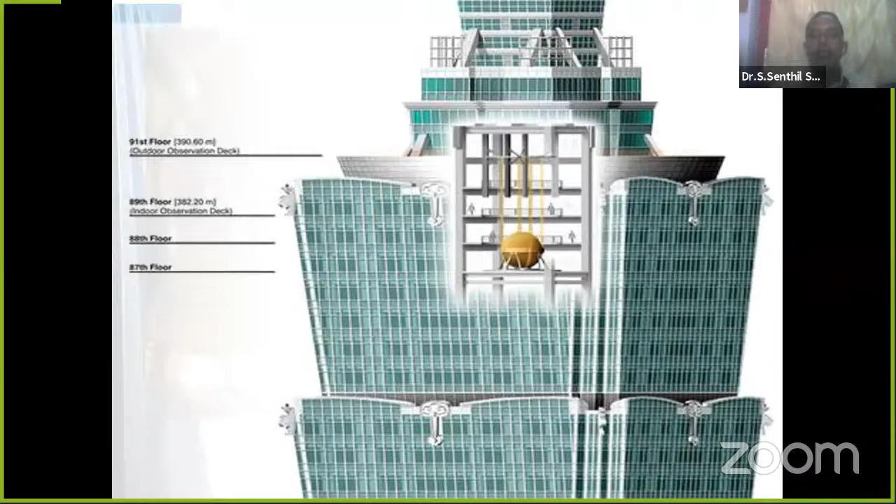Keep this in mind: when the building is moving left to right, the mass is moving right to left, against the movement of the building. So it will absorb more earthquake forces. When there is no earthquake force, it stays in a stable position, and when the building starts moving, it also starts moving in the opposite direction, absorbing large amounts of force without giving any damage to the building.

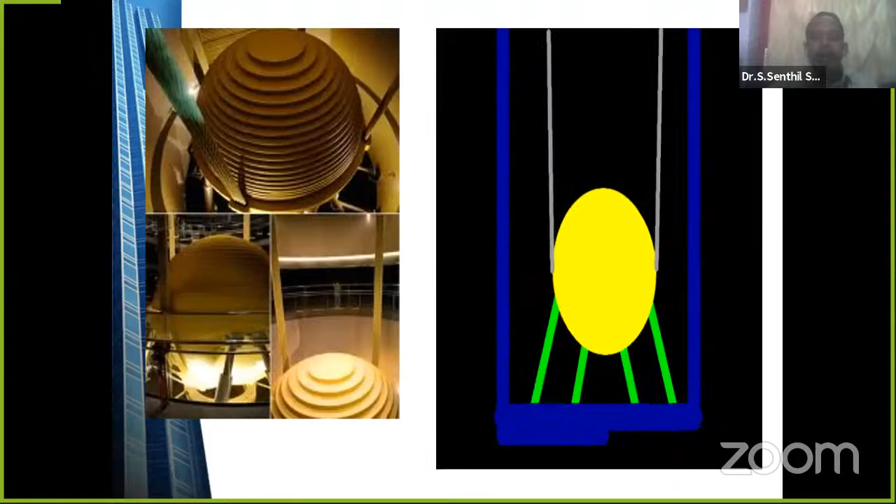This tuned mass damper was provided in Taipei Tower, Taipei 101. Its weight is 660 tons. It is a pinnacle type, 4.5 tons each, which was installed in 2002.

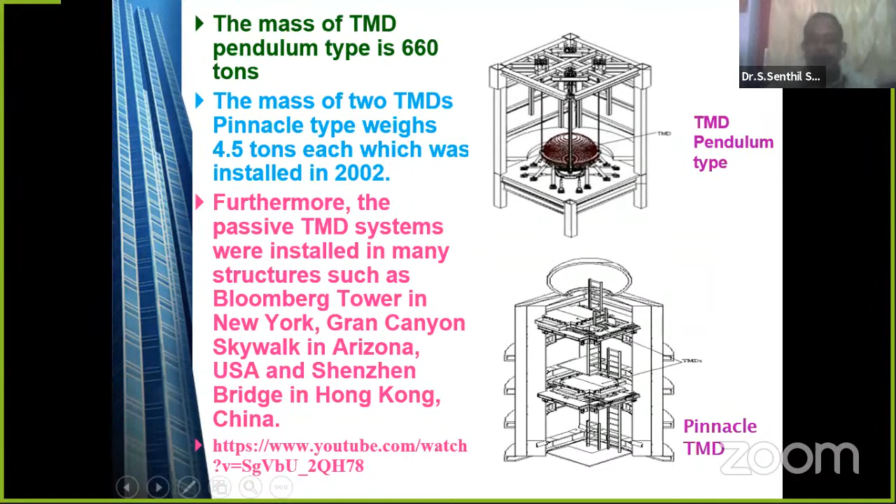Furthermore, tuned mass damper systems were installed in many other structures, such as Bloomberg Tower in New York, Grand Canyon Skywalk in Arizona USA, and Shenzhen Bridge in Hong Kong. This is a very interesting man-made invention.

Tuned liquid column damper: a column of liquid is provided, acting like a cushion. The column of liquid acts as a cushion and controls the vibration of the building - that's called the tuned liquid column damper.

This liquid is provided so that when there is movement of the building, it will move in the other direction to dissipate the energy. This is the tuned liquid column damper.

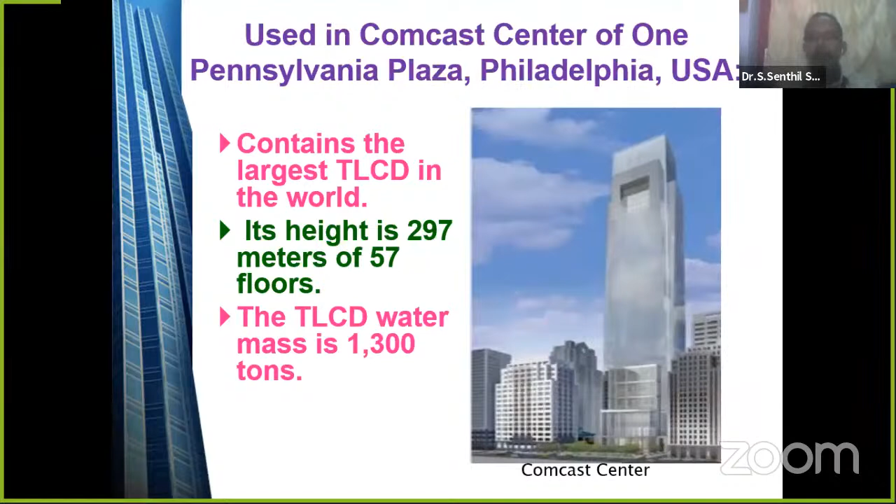It was already installed in the world at a height of 297, in the Comcast Center of Pennsylvania Plaza, Philadelphia, USA. They provide the tuned liquid column damper, which is nothing but a column of liquid that acts against the movement of the building, so that it will absorb a large amount of energy during the earthquake.

So far we have seen the concept of tall buildings and seismic resistant design of tall buildings - the important points to be followed during planning, analysis, design, and construction stages, and what dampers are required to absorb earthquake energy. And we are coming to the conclusion.

Nowadays there is an increasing trend to construct tall structures to minimize the increase in space problems in urban areas. There is no other way - we have to go for tall buildings. That's mandatory in this situation.

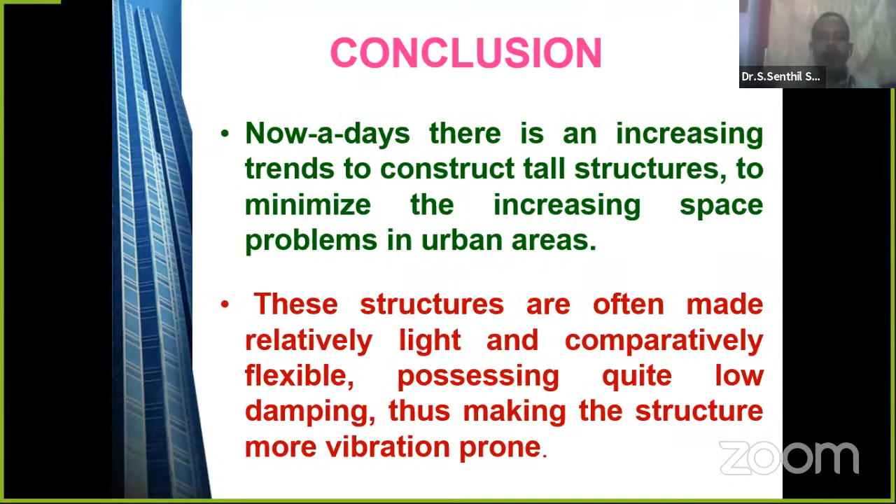These structures are often made relatively light and flexible, possessing quite low damping, thus making the structure more vibration prone. Various methods are there to overcome these problems, like aerodynamic design, structural design, and auxiliary damping devices, so that the structure becomes safe and stable from an earthquake point of view, particularly for tall buildings.

But recently it is found that the use of dampers is the best way to overcome this problem. We have invented a large number of dampers to take care of the seismic forces, or dissipation of energy developed by the earthquake - that's called seismic force.